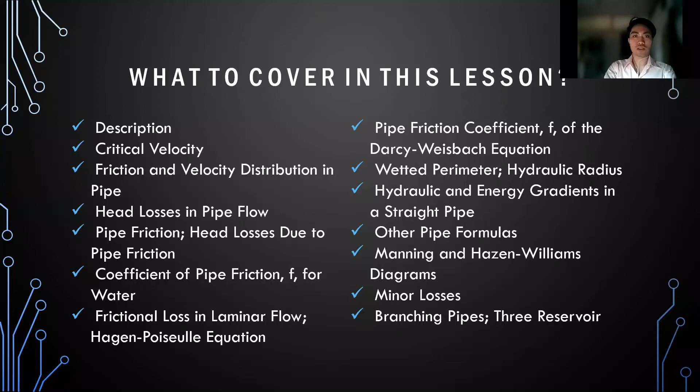So let's start with the most basic question: ano po ba ang pipe? Obviously, alam naman natin na ang pipe is just a closed conduit na nagtatransport ng either liquid or gas, under pressure. Gusto kong i-emphasize yung under pressure kasi hindi lahat ng makikita nating tubo is considered as a pipe. For example, yung tubig na nanggagaling from our water source, they are transported under pressure, so therefore they are called pipe.

Unlike, for example, yung sewer line natin, hindi naman sila nangangailangan ng pressure kapag itatransport nila yung fluid doon. So therefore, it's not considered as pipe, but rather an open channel instead. So yun yung parang distinction — pipes dapat, they should be under pressure, yung fluid na dinadala niya.

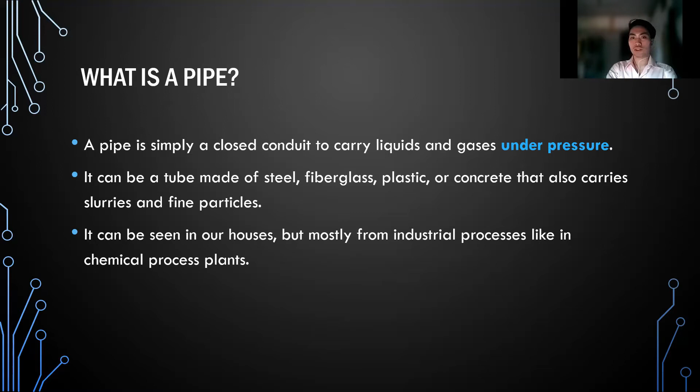So the next thing is, ang pipe hindi lang siya gawa sa plastic na usual na nakikita natin, but it can also be made of steel, fiberglass, and concrete, okay, that carries slurries and fine particles. And as I've said, ito yung nakita natin sa houses, yung from our water source, and mostly sa mga industrial, like sa chemical process plants.

So next thing is, ever wondered bakit ba circular in shape ang pipes natin? Sabi rito, most pipes are in circular form because it offers the least resistance to surface friction. Ano ba yung surface friction na yan? Ganito kasi yan — ang fluid natin kapag nag-flow sa pipe, nagkakaroon or nagde-develop ng friction. Ngayon, pag meron kang na-de-develop na friction, nagkakaroon din ng tinatawag natin head loss or energy loss, which is to be discussed later on. So that's why kailangan natin i-take into consideration yung surface friction — it should be of least resistance.

Now, ang circle kasi compared sa other polygons, say for example, square, meron silang mas maliit na perimeter compared sa other polygons. At dahil maliit ang perimeter nila, meron silang maliit na surface area. At dahil maliit ang surface area nila, it will offer the least resistance sa shape na circle. That's why they are commonly circular in form. Additionally, it has low initial cost and it provides the highest rate of flow, and there is minimum deformation that is seen kapag meron kang external pressure na applied.

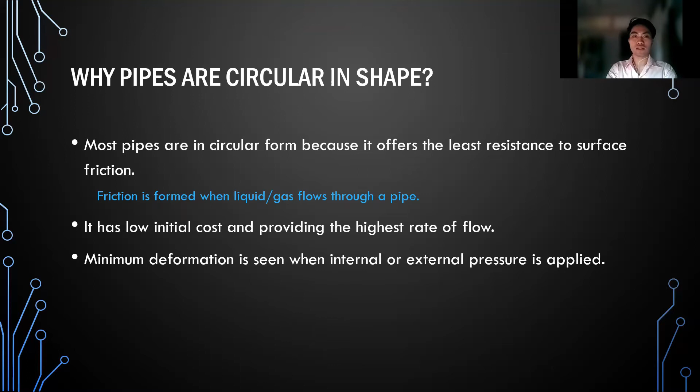Okay, so let's go to critical velocity. Critical velocity is just simply the velocity na kung saan nagbabago ang fluid mo from having a laminar flow to turbulent flow. Laminar flow and turbulent flow, na-discuss na ito sa previous discussions. We know that laminar flow ay characterized by having low velocity movements. So kung meron siyang low velocity movements, yung individual particles sa fluid na yon ay may sinusundan na tinatawag nating well-defined path — hindi sila gulo-gulo, para silang straight line, or not necessarily sobrang straight, but alam natin na may defined na path.

Unlike sa turbulent flow naman na kabaliktaran ng laminar flow, this is characterized by having a high velocity movement. At dahil mabilis ang movement, yung individual particles niya ay nagkakagulo-gulo, kaya they keep on crossing within each other. So hindi na nila nasusunod yung tinatawag na well-defined path.

So next, critical velocity experiment. This is Osborne-Reynolds, by the way.

So noong 1883, nagkaroon tayo ng experiment, si Osborne-Reynolds ng experiment. Where this is your glass tank, filled with water. This is your glass tube that has its bulb at one end at meron namang bell mouth sa other end. Now, this is your injector, a color, that contains colored dye.

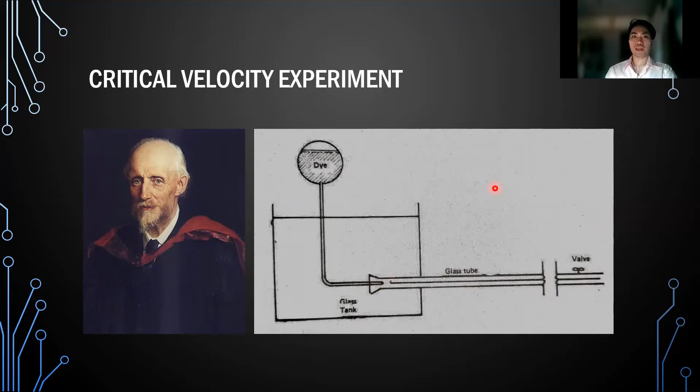Whereas nung tinodo naman ni Osborne ang pagbukas ng valve, at ulit, logically speaking, pag tinodo mo ang pagbukas ng isang valve, bibilis ang movement ng fluid. So magugulo yung individual particles ng dye. At ganun nga ang nangyari, naggulo na, hindi na nasunod ang path, kundi nagmix na siya doon sa water. Okay, so ganun lang po yung naging experiment ni Osborne-Reynolds.

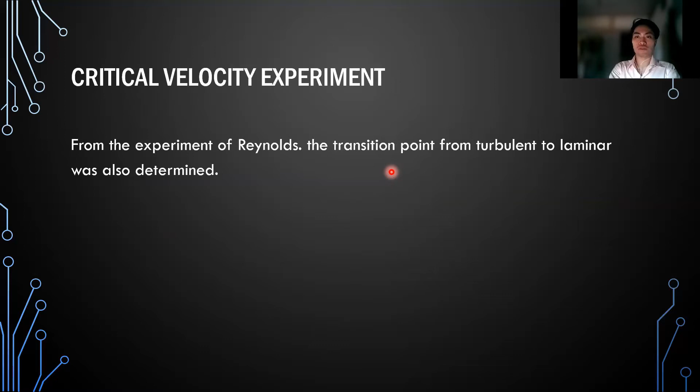So to further understand this concept, nag-provide po ako ng links para ma-visit mo. Additionally, dun sa experiment ni Reynolds, nalaman daw natin yung tinatawag na transition point from turbulent to laminar flow. Ayon sa kanya, it would require a smaller velocity kung gusto mong baguhin ang fluid na may turbulent flow patungong laminar flow, compared sa laminar flow to turbulent naman daw. And this is what we call the upper and lower critical velocities.

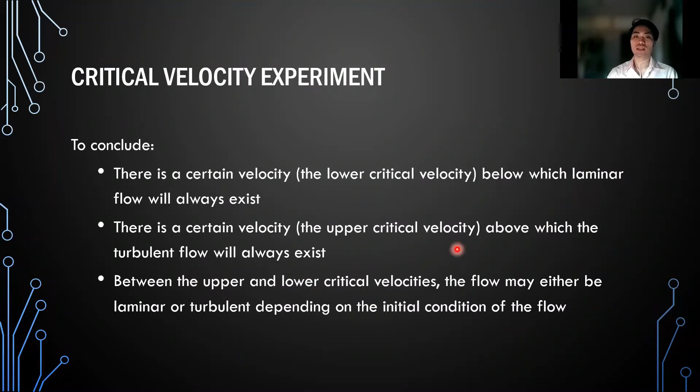So to conclude, alam natin na meron laging certain velocity which is the lower critical velocity, na kung saan lagi mag-e-exist si laminar flow. Ganun din kay upper critical velocity, na lagi mag-e-exist turbulent. So sa pagitan ni upper and lower critical velocities, dito sa pagitan na yan, there will always exist either streamline flow or turbulent flow, depende sa kung ano yung naging initial condition niya, dahil kung streamline flow ba siya nung una o turbulent flow ba siya nung una.

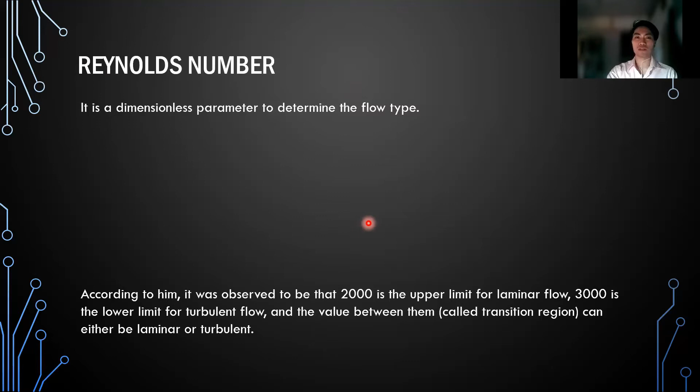Okay, so another thing is, sa experiment niya, si Osborne-Reynolds ay nakapag-develop din po siya ng criterion para malaman ang flow ng isang fluid. And that is what we call the Reynolds number. So Reynolds number is simply a dimensionless parameter para malaman nga natin yung flow type ng isang fluid. It has this formula that is equivalent to VD rho over mu, or VD over small letter v.

Where V, of course, is the mean velocity in meters per second, D is the diameter of the pipe in meters. Rho is your density in kilogram per cubic meter. Mu is your dynamic viscosity in Pascal-seconds. And then this small letter v is the ratio of the dynamic viscosity to the density, which is also what we call the kinematic viscosity. This is the formula of your Reynolds number para ma-determine natin ang flow type ng isang fluid.

According kay Osborne, sabi po rito, it was observed to be that 2,000 is the upper limit for laminar flow, 3,000 is the lower limit for turbulent flow, and the value between them, which is called the transition region, can either be laminar or turbulent.

So ano ang ibig sabihin nun? Sabi niya, kapag meron kang value ng Reynolds number na, let's say, 2,000 or less than 2,000, it means that yung flow type ng fluid mo would be laminar. Whereas kapag meron ka namang value ng Reynolds number na 3,000 or higher than 3,000, it means that the flow type is turbulent flow.

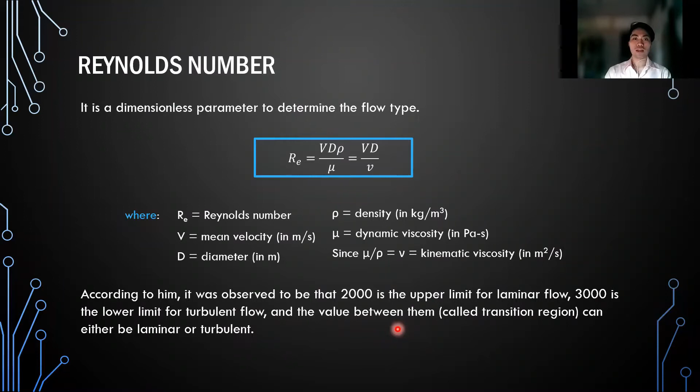At kapag nakakuha ka ng Reynolds number na sa pagitan ng 2,000 at 3,000, that is what we call the transition region, na again, sabi ko kanina, it can either be laminar or turbulent depende sa kung ano yung initial condition niya. Next po, let's try to solve this problem.

Calculate the Reynolds number of the fluid having a viscosity of 0.6 Newton second per square meter and a relative density of 850 kilograms per cubic meter, flowing through a pipe with a diameter of 25 millimeters and a velocity of 2.5 meters per second.

So apply given si data, no? 2.5, 25, 850, 0.6, and then apply lang natin yung formula ng Reynolds number, VD rho over mu. So that is equivalent to 2.5 times 0.025 times 850 over 0.6.

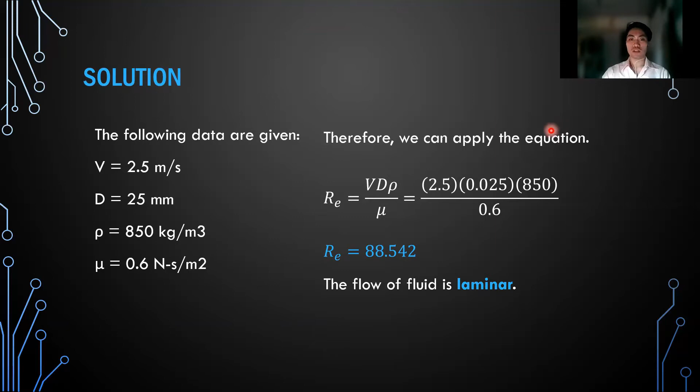And the answer is 88.542. So based sa criterion again ni Osborne Reynolds, hindi naman siya lumagpas sa 2,000. So therefore, this flow of fluid is considered to be laminar.

Okay, next po. Now, what is the profile of velocity of fluid in the pipe? Ano ba itsura ng velocity kapag nasa loob siya ng pipe? Yung fluid, velocity ng fluid. So this is the cross-section of your pipe.

Kung mapapansin nyo, parabolic ang shape ng velocity profile ng fluid, kasi ang maximum velocity occurring ay sa center. Ito yung sinasabi ko kanina sa friction thing. Kung mapapansin nyo, ang maximum velocity ay mag-occur sa middle kasi siya yung farthest dun sa pipe wall.

Again, kapag sa pipe wall at sa fluid may contact, nagkakaroon ng friction. At pag may friction, of course, magkakaroon ng head loss, magkakaroon ng decrease in the velocity. Kaya kung mapapansin nyo, as you approach patungo dun sa pipe wall, bumababa yung value ng velocity. Kaya nagmumukha siyang parabolic.

Now, of course, kung yung pipe mo is frictionless, magiging straight lang to. Magiging same lang yung velocity distribution niya, mapagitna, mapadulo, no? If frictionless. If not, magiging parabolic siya.

Now, if the pipe is bent, no? Ngayon, if balik mo naman yung pipe mo, ang mangyayari naman dyan, from being the center having the maximum velocity, mag-move yung maximum velocity sa part na form yung concave. So dito, na-bend siya pa-concave, therefore umangat yung maximum velocity mo.

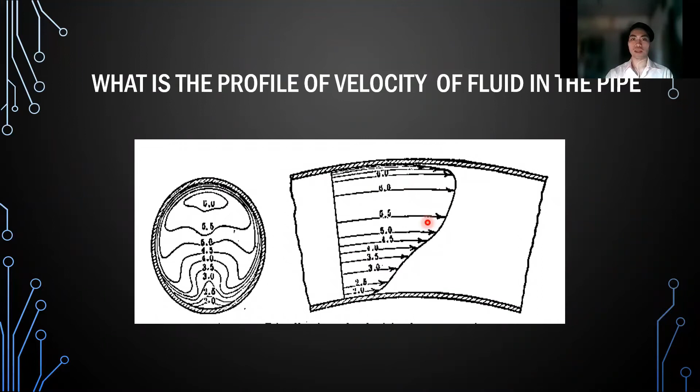At same thing pa rin, if presence si friction sa pipe walls, of course mariretard yung fluid, ang mangyayari, mababawasan yung velocity hanggang sa papalapit siya ng papalapit dun sa wall ng pipe. Okay, next is the velocity distribution.

Now, we have this term pipe factor, which is simply the ratio of the V over Vmax, where your V is the mean velocity sa pipe, and your Vmax is the maximum velocity in your pipe that is occurring at the center.

Now, Karman and Prandtl presented that the velocity distribution in the mainstream is represented by the relation. Na ito yung relation mo: V is equivalent to Vmax times Y over R raised to N, where N is obviously a constant, and it is equivalent to 1 over 7 if you have the Reynolds of about 100,000.

1 over 8 naman siya if you have your Reynolds number between 100,000 and 400,000, but for smooth pipes. If rough pipes naman, then the value of N would be 1 over 5.

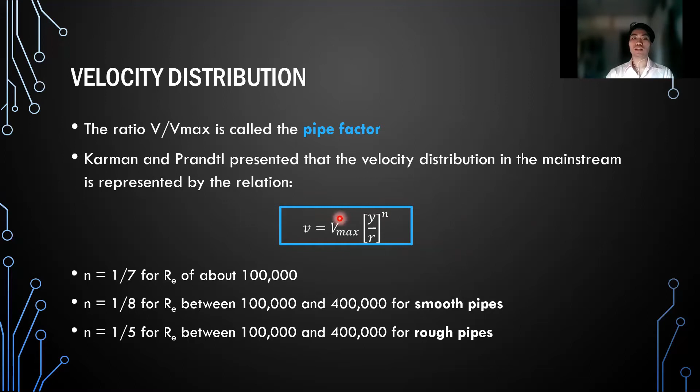Okay, now itong small letter V na to, that is the velocity of the fluid particle that is at y distance from the wall of the pipe, having radius r. Vmax, again, is the maximum velocity occurring at the center. Now, this is what we call the relation na pinresent ni Karman and Prandtl.

Now, next thing is the graph of the pipe factor as a function of Reynolds number. Ibig sabihin, pwede mo rin daw pala mahanap si pipe factor when you have the Reynolds number. Now, this is the graph of it. So, let's try this example.

For a given Reynolds number of 100,000, calculate the radius of a pipe with y that is equivalent to 15 millimeters from the pipe wall. Now, since given naman si Reynolds number na 100,000, of course ma-determine na natin si value of the constant, na 1 over 7.

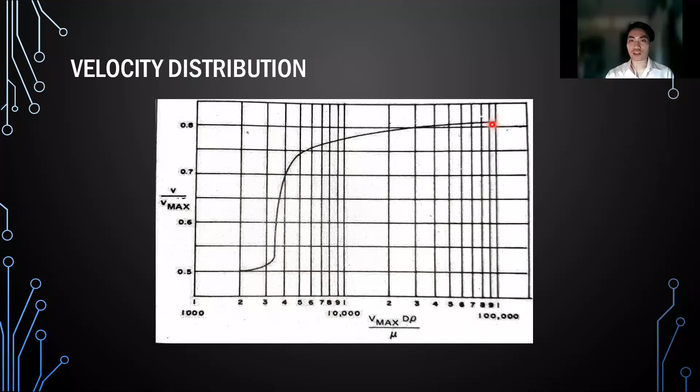By plotting from the table, since Reynolds number is given as 100,000, we can find the value of pipe factor, which is approximately 0.82. So divide both sides by Vmax to cancel Vmax and get the pipe factor: 0.82 equals 15 over r raised to 1 over 7. Solving for r, we determine 60.17 millimeters.

Now, head losses in pipe flow. What are the head losses in pipe flow? This is the energy loss I mentioned earlier, also known as the energy loss, measured in joules per Newton, or simply in meters, since a joule is equivalent to 1 Newton-meter. Therefore, canceling the Newtons, what remains is the meter.

So now, head losses in a pipe can be categorized as major or minor loss, with major being the pipe friction. The reason it is major is because pipe friction is the most common loss that occurs in a pipe. That's why it's classified as a major loss, and that is further discussed later on.

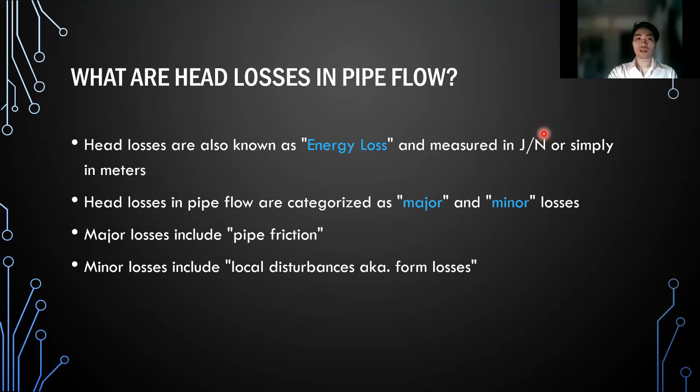Minor losses are the local disturbances we mentioned, or what we know as form losses. So next, let's go to these local disturbances. In local disturbances, or form losses, we have 4 head losses that cause head loss. First, we have the head loss due to the sudden contraction of the pipe's cross-section.

This is denoted by H sub C. Of course, if you have a contraction, you also have an enlargement, and this is denoted by H sub E. Next is due to obstruction caused by the gate valve, denoted as H sub O, and you also have head loss due to pipe bend, denoted by H sub B.

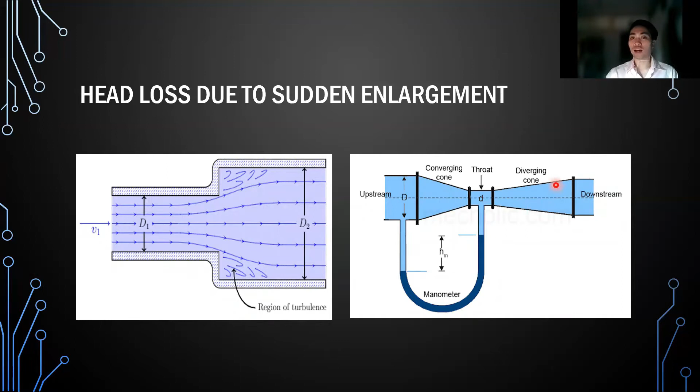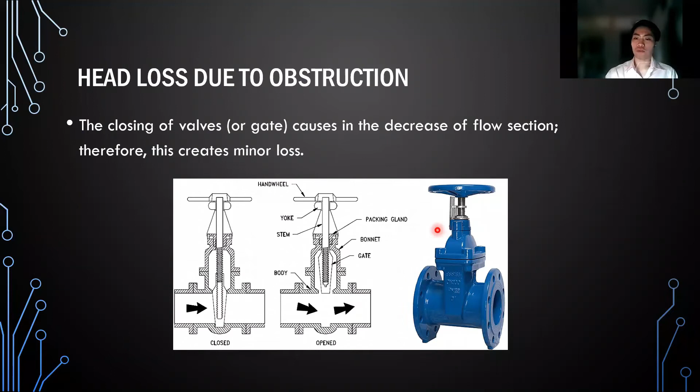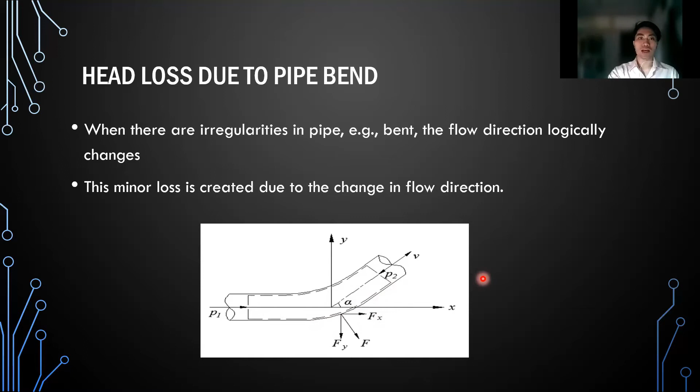To conclude, we know that the summation of the head losses in pipe flow is equivalent to H sub F, which is what we call the major loss or the pipe friction to be discussed later, plus H sub C, plus H sub E, plus H sub O, plus H sub B, which are the four I discussed earlier.

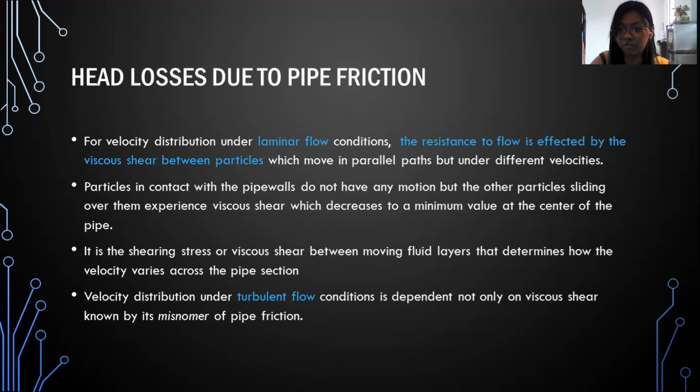At the pipe wall, this is where the no-slip condition occurs, and the velocity here is 0. The maximum velocity is usually at the center of the pipe. This is applicable only for laminar flow conditions.

Darcy-Weisbach equation. This equation was developed by Henry Darcy and Julius Weisbach. The equation is flashed in the PPT presentation. Head loss is denoted by H sub F.

So F is the coefficient of pipe friction, L is the length of the pipe, D is the internal diameter, V is the mean velocity, and G is the gravitational pull.

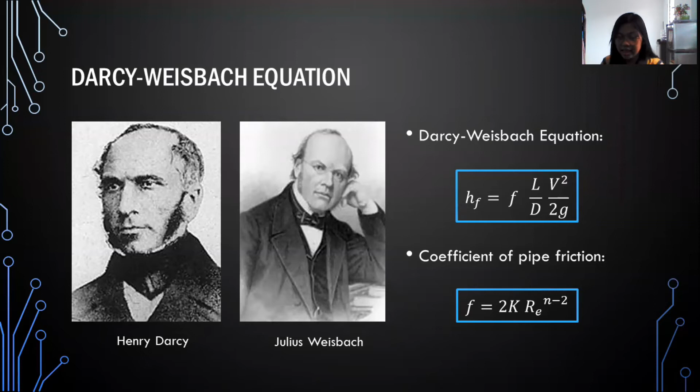The coefficient of pipe friction, or F, for straight smooth pipes which carry water under turbulent conditions - Fanning gives the average values of the pipe friction coefficient F for different pipe diameters and mean velocities of flow.

For the sample problem: a city water supply pipeline consists of a new 60 centimeter cast iron pipe. Compute the frictional loss of head per kilometer of pipe when the discharge is 0.35 cubic meter per second.

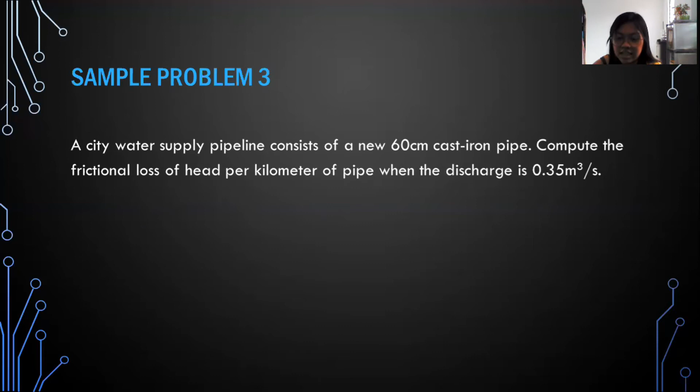Here, the diameter is given, 60 centimeters, so that's 0.6 meters. The other given information is 0.35 cubic meter per second, that is the discharge. So we can use that to calculate the velocity.

So 0.35, the discharge, over pi over 4 multiplied by the diameter, 0.6, squared. With that, we will get a velocity of 1.24 meter per second.

So we have the diameter and we also have the velocity, meaning we can find the coefficient of pipe friction. By plotting from Fanning's table, F is determined to be 0.018. Let's go back to the table.

So we have all the needed information. We will input all the values into the formula of the head loss. Coefficient of pipe friction is 0.018, the diameter is 0.6, the mean velocity is 1.24, and gravitational pull 9.81.

With that, we will come up with an answer of 2.35 joule per Newton. That is the head loss.

For sample problem number 4: determine the discharge of water through a 90 centimeter wood stave pipe if the loss of head is 5 joule per Newton in a length of 1,600 meters.

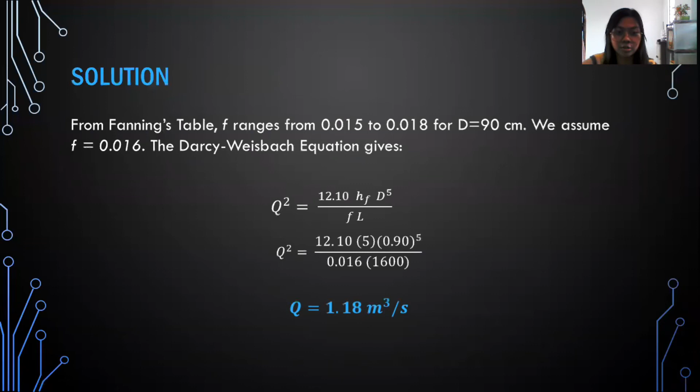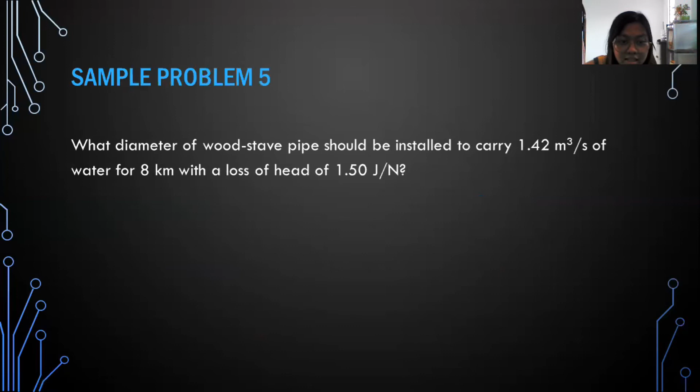In this problem, the coefficient of pipe friction is crucial for the Darcy-Weisbach equation. Let's try another value, 0.013. Using the same procedure, we come up with a diameter of 1.63 meters and a velocity of 0.68. Checking the table: the diameter is 1.63 meters, around 163, and the velocity is 0.68. We get 0.013, which is the same value we assumed, so it's okay. We were finding the diameter, so the answer for this problem is 1.63 meters.

Next, sample problem number 6. Water is pumped through a vertical 5 centimeter new galvanized iron pipe to an elevated tank on the roof of a building. The pressure on the discharge side of the pump is 1,380 kilopascals. What pressure can be expected at a point in the pipe 76 meters above the pump when the flow is 9.5 liters? For this problem, the diameter is given as 5 centimeters, and the velocity is unknown.

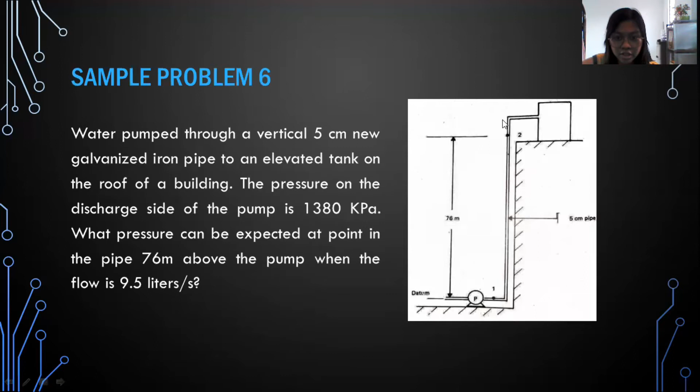In this scenario, we can apply the concept behind Bernoulli's equation, using this formula for points 1 and 2. Since V sub 1 equals V sub 2, we can simplify the formula. Calculating this equation, we come up with the answer: the pressure is 225 kilopascals at the point 76 meters above the pump. So the answer in this problem is 225 kilopascals.

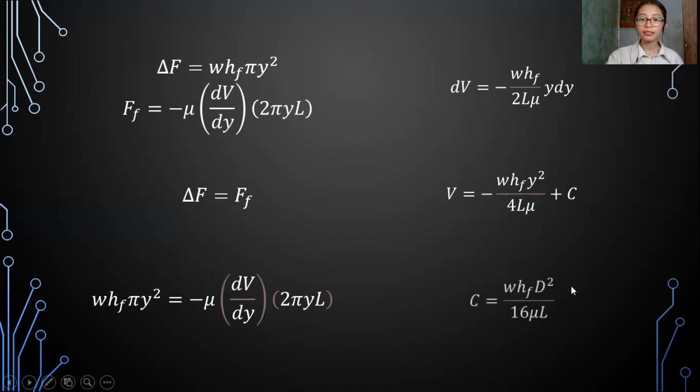After non, magsiset tayo ng boundary condition sa wall ng ating pipe where V is equal to 0. So papalitan natin ito ng 0, and y is equal to d over 2, yung ating radius d over 2. Makukuha na natin si C. Substituting this value of C sa ating previous equation, makukuha na natin ang bagong equation na ito.

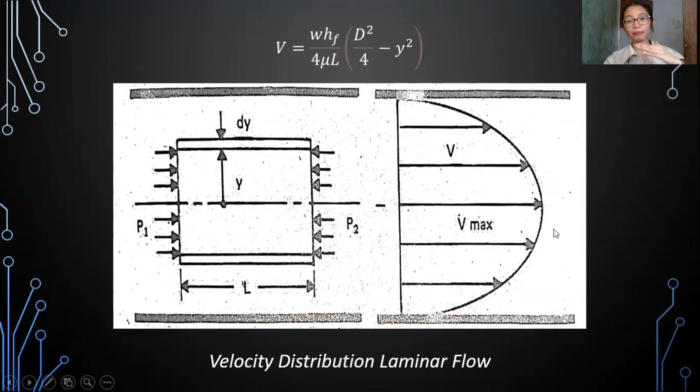Next, balik tayo sa ating unang figure. Kukuha tayo ng elemental ring na may thickness ulit na dy and radius na y. Since meron tayong flow rate sa loob ng ating pipe, itong elemental ring na ito ay may elemental flow rate na tatawagin natin dq. And this can be written as dq is equal to v times 2 pi y dy.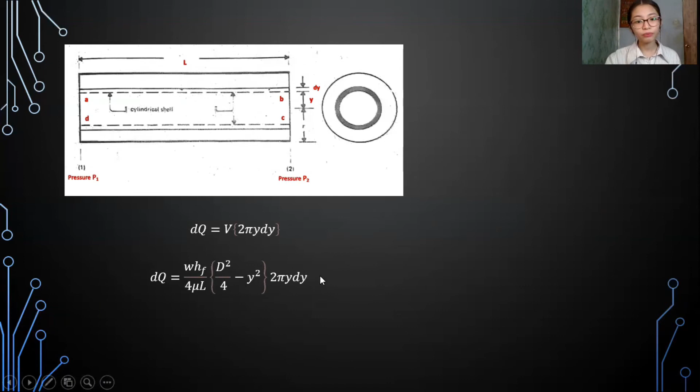Substitute natin ito sa ating nakuhang v kanina, at makukuha natin itong equation na ito which can also be written as this equation. Pag in-integrate natin itong equation na ito ulit from 0 to d over 2, makukuha natin ang ating Hagen-Poiseuille equation which is written as Q is equal to pi W HF all over 128 mu L times d to the fourth.

Mula dito sa equation ng ating Hagen-Poiseuille equation na based sa flow rate, makukuha rin natin ang ating frictional loss HF under laminar flow conditions. Pwede nating i-simplify itong equation na ito by further substituting itong value ng Q, which is alam naman natin na area times velocity. Sa pipe na ito, makikita natin na ang area times velocity ay pi d squared all over 4 times V. Substitute natin ito at makukuha natin ang ating frictional loss HF under laminar flow condition.

Parehas itong ituturing na Hagen-Poiseuille equation dahil derived na sila sa isa't isa. Makikita natin sa Hagen-Poiseuille equation na ito na ang flow rate sa loob ng isang pipe or cylinder ay nakadepende mostly sa diameter nito, sa laki, at sa length ng pipe, pati na rin sa viscosity ng ating flowing fluid. Makikita natin na pag in-increase natin ang viscosity or ang mu at ang ating length or ang L, magdi-decrease ang ating flow rates, since sila ay inversely proportional from each other. At pag in-increase naman natin si diameter, mag-i-increase din si flow rate since sila ay directly proportional.

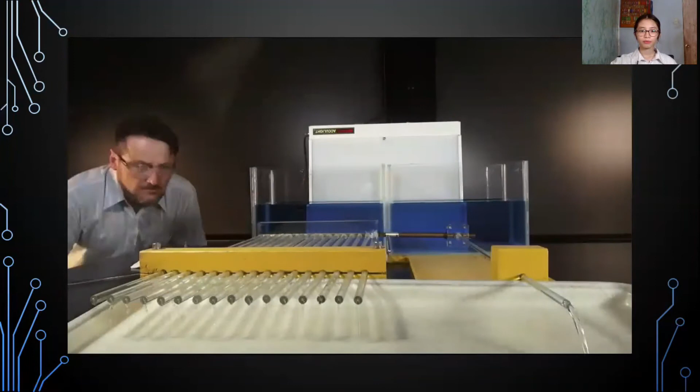Pwede siguro yan. So makikita natin sa video na mas marami yung outlet sa ating kaliwang tank kaysa sa kanan na tank. To be specific, 16 yung nasa kaliwa at iisa lang yung nasa kanan.

Ngayon, ang pinagkaiba nilang dalawa ay ang kanilang diameter. So makikita natin na although mas maraming outlet tubes yung nasa isang tank at iisa lang yun nandun sa isa, halos sabay pa rin yung pagbaba ng tubig, obviously, dahil mas malaki yung diameter nung nasa right tank. So binu-prove nito yung ating Hagen-Poiseuille equation na kapag ang diameter ng tube ay directly proportional sa ating flow rate. So since in-increase yung diameter sa ating right tube or right tank, mas mataas din yung flow rate niya.

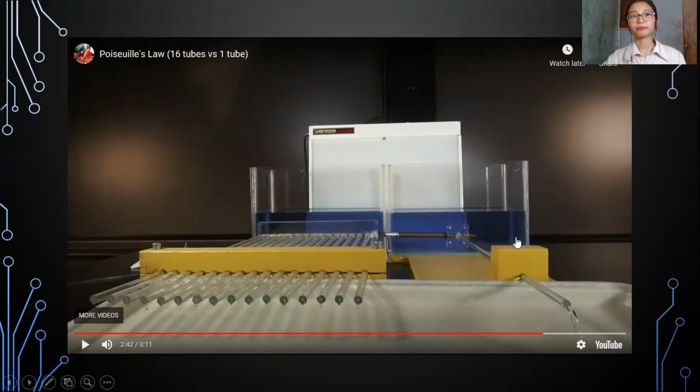So here are some remarks. First, there is no velocity at the solid boundary, and in laminar flow, shear stress is given by the relationship tau is equal to mu dv over dy.

Hindi lang ito assumed, kundi verified ito experimentally, hindi lamang ni Hagen at ni Poiseuille, kundi pati rin ng ating iba pang later investigators.

Next, Hagen-Poiseuille equation can be reduced into a form similar to Darcy-Weisbach equation. Ang equation na tinutukoy doon ay ito: HF is equal to 64 over Reynolds number times L over D times V squared over 2G. So which shows that the pipe friction coefficient F for laminar flow is F is equal to 64 over RE. Ito yung nasa kanina nating unang-unang page ng ating coefficient of pipe friction for laminar flow. Nagaling dito sa equation na ito.

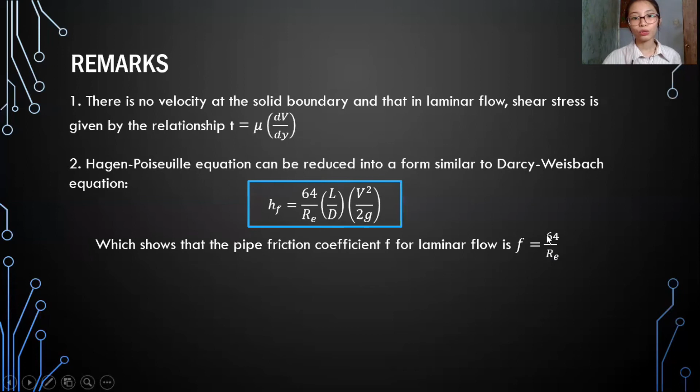And lastly, last remark for this topic: the relationship of maximum velocity Vmax and the mean velocity V can be obtained through noting that Vmax occurs at y is equal to 0. So y is equal to 0 kasi alam natin na yung pipe natin ay ganyan, at yung y niya ay yung radius. So pag sinabi mong y is equal to 0, nasa gitna yun. So Vmax is equal to 2V. Itong relationship nito. Okay, so now let's go to coefficient of pipe friction of the Darcy-Weisbach equation.

So in this part, I will talk about the determination of F of the Darcy-Weisbach equation for pipes having different degrees of roughness and through which any kind of fluid flows, hindi lamang water, kundi kahit anong kind of fluid.

So para sa pipes under laminar flow, kung saan ang ating Reynolds number R sub E is less than or about 2,000, yung head loss natin ay independent, hindi nakadepende mula sa degree ng roughness ng inner surface ng ating pipe. So kanina, na-determine natin sa Hagen-Poiseuille equation na yung value of F or coefficient of pipe friction sa under this condition or laminar flow ay F is equal to 64 over R sub E.

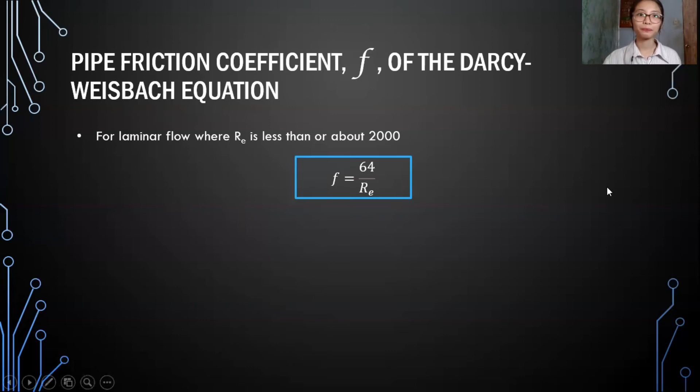Pero kapag ang Reynolds number natin ay lumagpas ng 2,000 and umabot sa more than 3,000, in almost all circumstances, ito ay wala na tayo sa laminar flow, kundi nandun na tayo sa turbulent flow. Sa case na ito, ang coefficient of pipe friction natin, pati ang frictional loss or H sub F tsaka F natin ay dependent hindi lamang sa Reynolds number, kundi pati na rin sa relative roughness ng ating pipe.

So ang relative roughness is given by the equation epsilon over diameter, kung saan ang epsilon na to ay ang tinatawag o ang tinutukoy nito ay ang height of ating protuberances. So ito yun, this is the epsilon. Ito yung roughness ng ating pipe. Tapos, yung height ng bawat protuberances ay tinatawag nating epsilon.

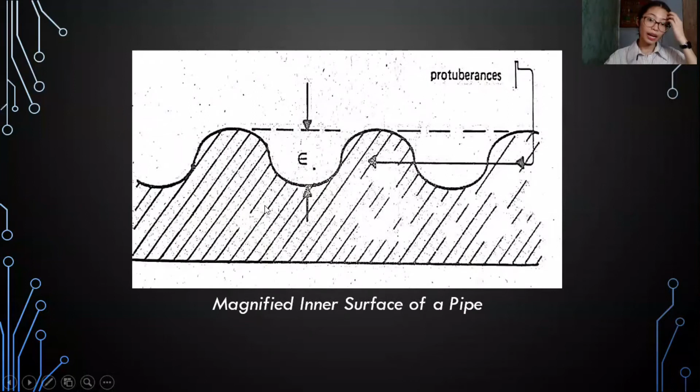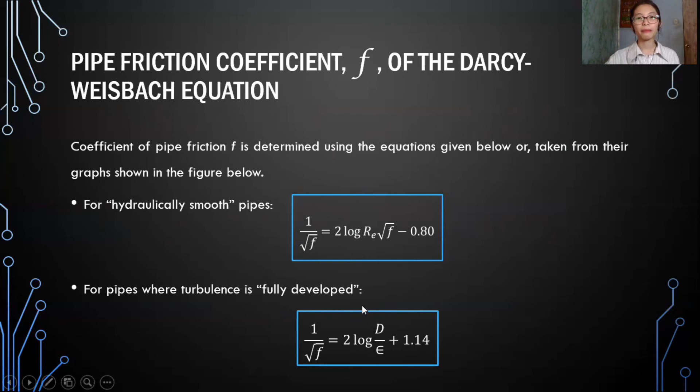So, here are some remarks for this. How do we know if flow is hydraulically smooth or fully developed?

In turbulent flow, there is a layer known as the boundary layer, a thin layer adjacent to the pipe wall where the flow is still laminar. If epsilon is less than the thickness of this layer, the pipe is considered to be flowing hydraulically smooth, meaning the value of F is independent of the pipe's roughness. But if epsilon is greater than the boundary layer thickness, then the pipe's roughness becomes a factor on flow turbulence and has a direct effect on the value of F.

When the amount of turbulence has increased to a maximum value as a result of increase in Reynolds number, the flow turbulence is said to be fully developed. This condition causes a decrease in the thickness of the boundary layer.

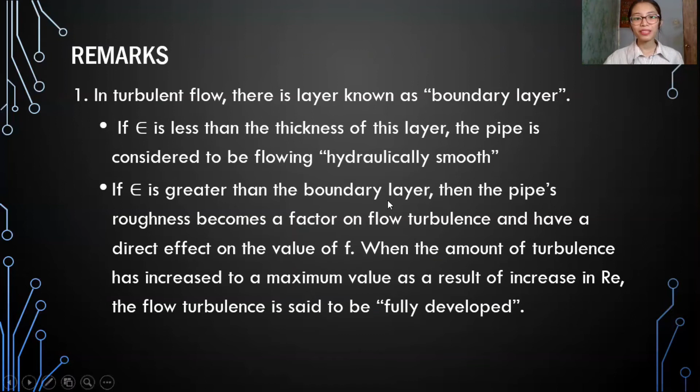Between these two conditions, hydraulically smooth and fully developed, we have a region given by the relation 1 over square root of F, as suggested by Colebrook and White, 1939. Lastly, in the region where Reynolds number is greater than or equal to 2,000 but less than or equal to 3,000, where flow is either laminar or turbulent, values of F corresponding to a Reynolds number of 3,000 are recommended for safety and design purposes. I hope you understood. Let's go now to our sample problems.

Sample problem number 7. An oil with density 900 kilograms per cubic meter and kinematic viscosity 0.0002 square meter per second flows upward through an inclined pipe as shown. Assume this pipe is under steady laminar flow, and compute the following: head loss between section 1 and 2, and the flow rate.

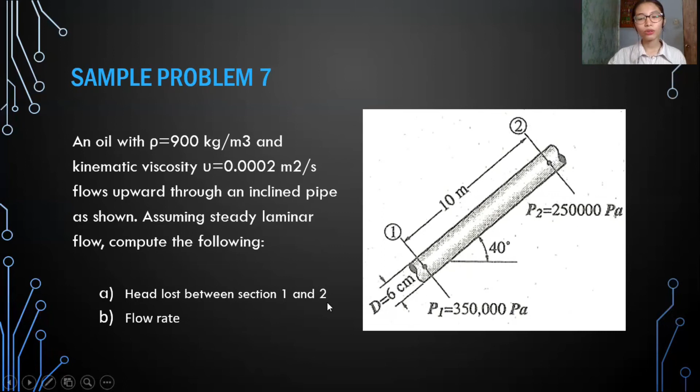Pressure head is equal to pressure over specific weight, and specific weight is equal to rho times gravity. Substituting values from our figure: pressure at point 1 is 350,000 Pascal, all over rho given in the problem, which is 900 times gravity 9.81. From this, we get the total energy head at point 1, which is 39.642 meters.

That's not yet the final answer since we need the head loss between sections 1 and 2. Next we need the total energy head at point 2, given by this equation, which includes P over W plus z since there is height. Substituting: P2 is 250,000 all over specific weight (rho times g = 900 times 9.81), plus z which is 10 sine of 40 degrees. This gives us 34.744 meters.

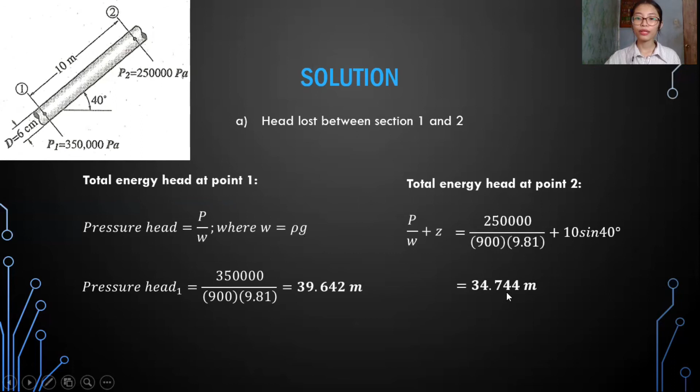We get the head loss by subtracting these two: total energy head at point 1 minus total energy head at point 2, giving us 4.898 meters. That easy. Next we find the flow rate.

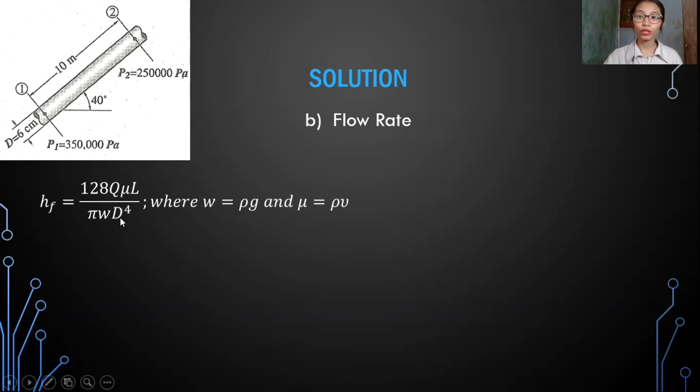How do we find the flow rate from this figure? We know from our derivation earlier that head loss equals 128 Q mu L all over pi W D to the fourth, where W equals rho times g, and mu equals rho times the kinematic viscosity given in the problem.

Substituting this gives us a new equation, substituting all the given values from the problem and the figure, and this is the equation we get. Solving this, we get the answer Q equals 0.007642 cubic meter per second.

That's easy. Okay, next problem, which is the last problem for this section. A hypodermic needle has an inside diameter of 0.3 millimeters and 60 millimeters in length as shown, here is our figure. The piston moves to the right at a speed of 18 millimeters per second, and there is no leakage.

The medicine in the hypodermic has a viscosity of mu equals 0.980 times 10 raised to negative 3 Pascal second, and its density is 800 kilogram per cubic meter. Consider flows in both needle and cylinder, and neglect exit losses from the needle as well as losses at the juncture of the needle and cylinder.

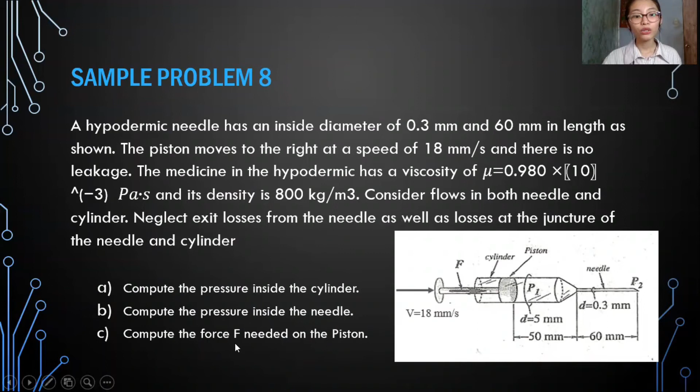From that problem, here are our requirements: we need the pressure inside the needle, pressure inside the cylinder, and the force F needed on this piston.

Let's proceed. First is pressure inside the cylinder. We get this by knowing that Q equals area times velocity. From this figure, our area is pi over 4 times 0.005 squared times 0.018.

Mula yan dito sa ating cylinder, kasi cylinder pa rin hinahanap natin. So ang flow rate sa ating cylinder ay 3.534 times 10 raised to negative 7 cubic meter per second.

Next, ito ulit ang ating equation. Mula sa ating equation, makukuha natin yung equation ng pressure, which is yung hinahanap, which is ang rho G times H sub F. Ito po yung equation na ito: 128 Q mu L all over pi D to the fourth. Yan po ang ating equation ng pressure.

Mula dyan, substitute lang po natin ang ating values. 128, yung nakuha po natin Q kanina, and then ang ating mu na given sa ating problem, ang ating length na 0.05 meters, naka-meters po yan kaya po lumiit, and then ang ating pi d to the 4. Okay? So mula dyan makukuha natin ang pressure inside the cylinder, which is 1.129 Pascal.

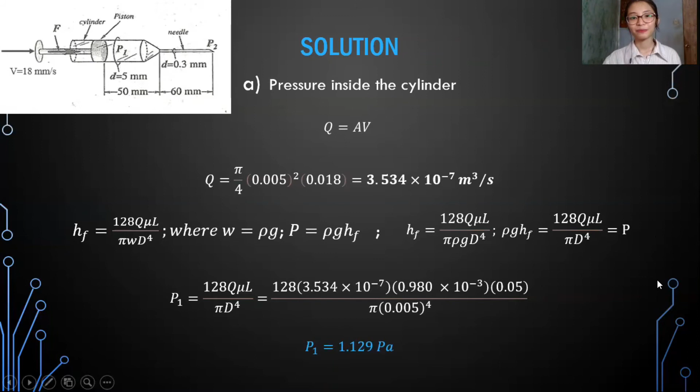Next po, pressure inside the needle naman tayo. Alam na natin na ang equation for pressure ay this one. Substitute lang po tayo: 128 times yung flow rate na nakuha natin kanina, times mu na sabi sa problem, times length ng needle na 0.06 meters, all over pi times ang ating diameter to the 4. Makuha natin ang pressure inside the needle, which is 104,525 Pascal. So mas malaki yung pressure niya since mas maliit yung diameter niya.

Okay, next tayo, last na po, force F needed on the piston. So alam ulit natin, kanina recall natin, nasabi ko na force is equal to pressure times area. So makukuha natin mula doon ang equation na to: Force is equal to P2 minus P1 times area. Makukuha natin ang force F through subtracting yung nakuha nating P2 or yung pressure inside the needle minus yung pressure P1 or yung pressure inside the cylinder, times yung area natin, which is yung pi over 4 times diameter squared. Okay? Makukuha natin ang force F needed on the piston, which is 2.05 newtons. Yun lang po, maraming salamat.

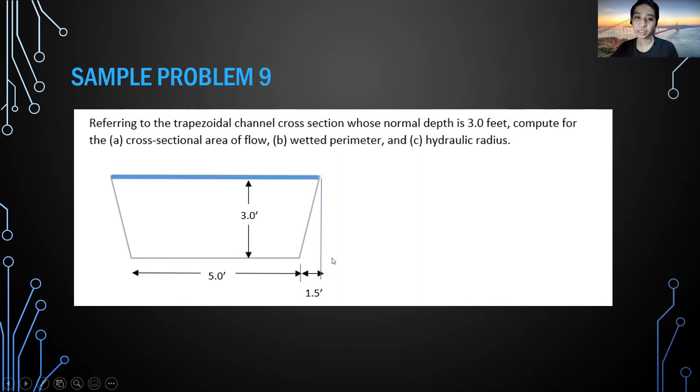Para makuha natin, balikan natin yung kanina na formula sa trapezoid, which is para daw mahanap natin yung area A, i-multiply natin yung quantity ng base plus yung Z times yung depth, as yung product nila ay yung sum ng product ng dalawa is i-multiply sa Y. So yun, A is equals to Y times quantity B plus Z times Y. I-plug in natin yung mga values kanina sa given na channel. Ang sagot natin is 28.5 feet squared.

Pagkatapos natin makuha yung area of flow ng cross-section, proceed na tayo sa wetted perimeter, kasi recall natin, ang hydraulic radius daw ay ratio ng A sa P. So para mahanap natin yung wetted perimeter, plug in lang natin yung values. Lalabas na yung size, yung length ng perimeter natin is 15.82 feet.

Para malaman natin yung hydraulic radius ng problem, i-ratio lang natin yung nakuha nating area dun sa na-compute nating wetted perimeter, which is 28.5 square feet divided by 15.82 feet. So ang hydraulic radius natin for that problem is 1.8 feet.

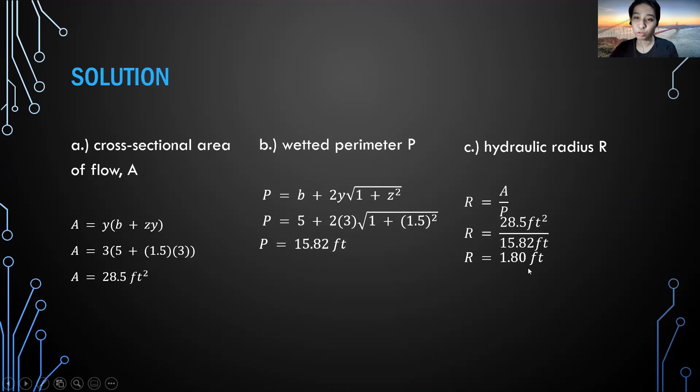Proceed na tayo sa hydraulic and energy gradients in a straight pipe. Recall natin yung Bernoulli's equation, which is velocity 1 squared over 2g plus p over gamma plus z is equals yun nga yung Bernoulli's constant. Sabi dito, HGL and EGL, yun nga yung hydraulic grade line and energy grade line, are graphical representations of Bernoulli's equation. So ipapakita natin paano nga ba nasabi na graphical representation sila ng Bernoulli's equation.

Isa-isahin muna natin. Hydraulic grade line, sometimes called piezometric head line, is represented by the equation p over gamma plus z, where p over gamma is pressure head and z is the elevation head. HGL is a plot of height.

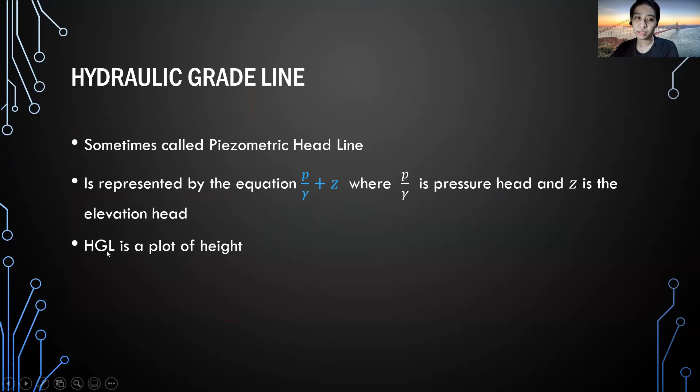Tapos ang energy grade line naman is Bernoulli constant. Paano natin nasabing Bernoulli constant? Kasi yung buong equation ng Bernoulli constant, yun yung kailangan gamitin para mahanap natin yung energy grade line. Kasi since nga siya yung parang total na energy doon, magagamit natin siya sa real flows with viscous losses.

So i-consider natin tong inclined pipe na pinakita para i-explain yung kanina. Sabi yung HGL daw, yung pinagsamang sum ng pressure head and elevation head. Yung elevation head natin dito is from a relative point from the arbitrary datum, which is yung sa baba, papunta doon sa pipe. Yun yung elevation head natin. Tapos yung pressure head naman natin is from the pipe hanggang doon sa na-reach nung piezometer natin.

Kaya nga tinatawag yung hydraulic grade line na piezometer grade line din, kasi nga reliant tayo sa value ng piezometer. Tapos neglected natin yung taas kasi yun yung parang energy losses. Kasi ang energy grade line natin is yung pinaka-total. Kumbaga yung pag pinag-plus lahat ng energy na nasa system natin, ang lalabas na sagot ay yung energy grade line.

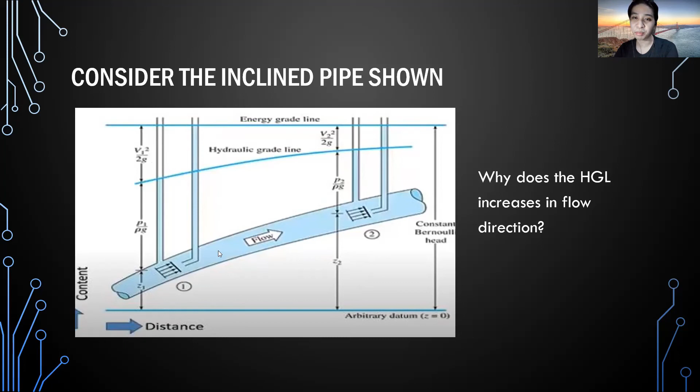Kaya tayo ng section 1 and section 2 para malaman natin kung ano ba yung progress ng hydraulic grade line, kung nagpro-progress pa or nagre-regress. Mas nakikita natin yung ganitong observation sa inviscid flows, kasi constant lang yung energy content unless may makita tayo dun, ma-observe natin sa hydraulic grade line kung nadadagdagan ba or nababawasan yung energy. Kasi nako-convert yung kinetic into pressure, pag dinagdagan ng pressure into potential. For further explanation regarding how hydraulic grade line works as well as the energy grade line, refer to this link below. Thank you.

Okay, let's move forward naman sa minor losses. Earlier, nabigyan na ng brief background yung about sa head losses, yung sa pressure head nga. This time, explore naman natin yung conditions kung saan nagaganap yung concept of minor losses. I-introduce natin ang two subtypes, which is yung una is sudden contraction of pipes, then yung pangalawa is sudden enlargement or expansion of pipes.

Minor losses. Ano nga ba yung pagkaka-define natin sa minor losses? Ang minor losses ay nagaganap sa isang piping system. Yung flow ng piping system kasi required siya na mag-pass through ng variety of fittings at abrupt changes sa area. Dahil doon, may encounter tayo ng additional head losses, which is result nun ay flow separation, which is categorized under minor losses.

Minor losses can be expressed in the equation: minor loss equals K, which is the coefficient we find in the table of values depending on the category or condition that happened. Then V is the velocity, and g is the constant. This results from changes of velocity—the velocity head we're discussing in this part.

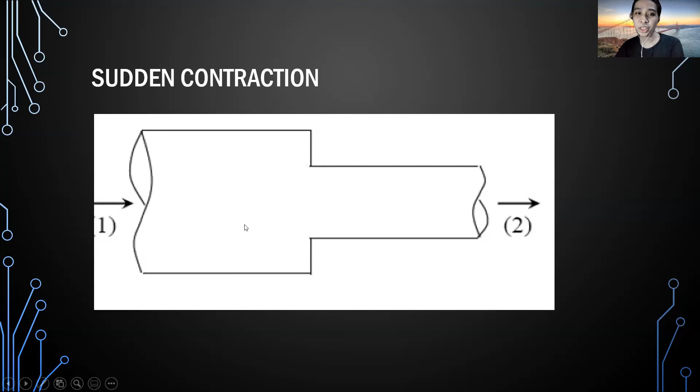So here's the first one, sudden contraction. We notice it goes from a larger pipe into a smaller pipe. The loss of head due to sudden contraction may be expressed as: head loss of contraction equals coefficient of contraction times velocity squared all over 2g, where velocity is the mean velocity in the smaller pipe. And that coefficient can be expressed as the ratio of D2 over D1, the diameter of the second pipe over the first pipe.

So how do we explain sudden contraction properly? Let's imagine that the entrance is from a finite reservoir. From there we already know that sudden contraction happens between two sizes of pipes. Let's look at the table I mentioned earlier, which we base the values of Kc on—the coefficient of sudden contraction. There we can see the velocity, and the ratio of the first diameter of the pipe to the second diameter of the pipe. We'll understand it better with a problem.

Sample problem 13: What is the loss of head due to sudden contraction in a pipe carrying 57 liters of water, which suddenly changes from a diameter of 20 centimeters to 15 centimeters? Also find the pressure difference resulting from this change of section.

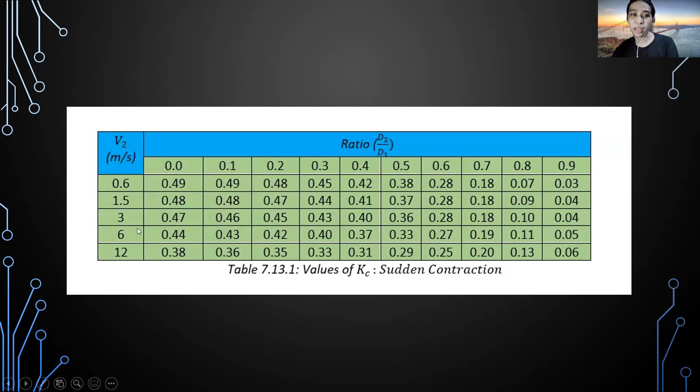Now we base this on the table of values I showed earlier. We notice there's no exact 3.2, so we'll do linear interpolation. We take the values from 3 to 6, then find a way to determine the value at 3.2. So let V2 equal 3.2 meters per second. Using linear interpolation, the coefficient of sudden contraction value we got is 0.14.

Let's plug it into the formula: head loss equals Kc times final velocity squared over 2g. So 0.14 times 3.20 squared, all over 2 times 9.81. The answer is 0.073 meters. That's the loss of head asked in the problem.

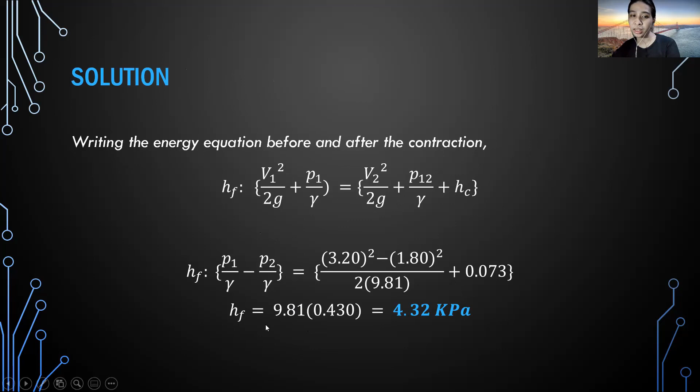Now let's proceed to the next part of the problem: find the pressure difference resulting from this change of section. We'll use the Bernoulli concept we recalled earlier—this is for the first pipe, then this is for the second pipe, since that's where the head loss occurs. We just plug in the values, and the answer we got is 4.32 kilopascals.

Now let's proceed to sudden enlargement. What do you notice about sudden enlargement? Unlike earlier where it went from a bigger pipe to a smaller pipe, here it goes from a smaller pipe into a bigger pipe. The loss of head due to sudden expansion or enlargement is similarly expressed as a fraction of the velocity head in the smaller pipe. This formula is similar to the earlier one, but here the smaller pipe comes first before the bigger pipe, so the velocity we use is the initial velocity since the smaller pipe comes first.

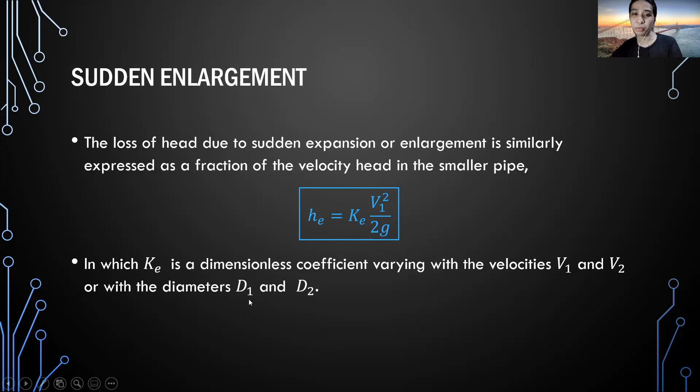Then there's Ke, the dimensionless coefficient based on the table of values for sudden enlargement, which still relies on the ratio between the first diameter and the second diameter. This is table 7.13.2 for sudden enlargement, and table 7.13.3 is for gradual enlargement, which is kind of a special case of sudden enlargement. So let's look at the problem.

Problem 14: What is the loss of head due to sudden enlargement in a pipe carrying 57 liters of water, which suddenly changes from a diameter of 15 centimeters to 20 centimeters? Also, find the pressure difference between the two points before and after the change of section.

So our first process is to find the ratio between the first diameter and the second diameter, which is 0.75. Then we need to obtain the radial velocities from the two pipes: the first pipe has 3.20 meters per second while the second has 1.8. We can see that the radial velocity of the first pipe is higher.

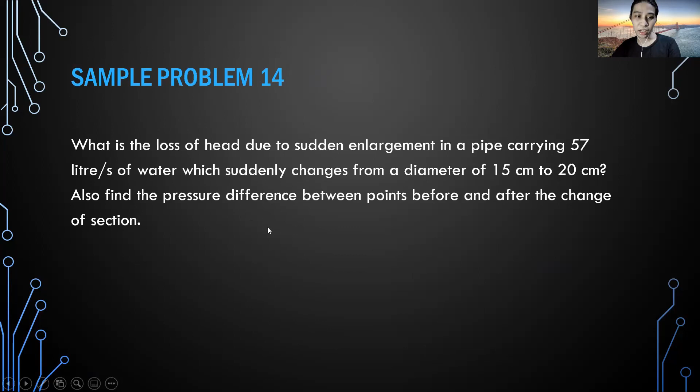The answer is 0.195. That's the value we plug into the formula for head loss due to sudden enlargement: 0.195 times 3.20 squared, all over 2 times 9.81, which is the constant of gravity. Our answer for head loss is 0.10 meters.

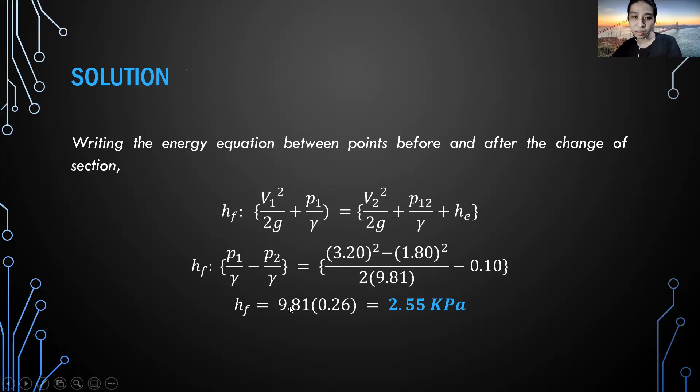Good day, I am Janet Olfashol and I will be discussing branching pipes, specifically three reservoir problems. There are two cases that we must consider in analyzing three reservoir problems.

By reason of continuity, what flows in and what flows out of junction J are equal. With this, we can derive a continuity equation: Q1 plus Q2 is equal to Q3. Under this flow condition, the liquid surface on the piezometer will be below reservoir A and reservoir B.

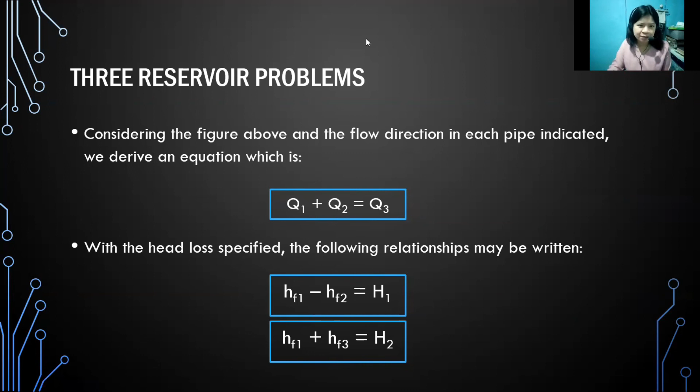For case 2, where the flow in the second pipe is towards reservoir B, the liquid surface on the piezometer rises to a point above that of reservoir B but below reservoir A. Under this flow condition, the continuity equation now becomes Q1 is equal to Q2 plus Q3.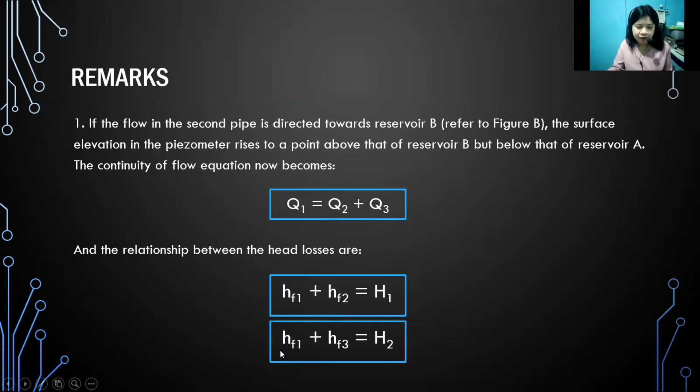Other head loss relationships are HF1 plus HF2 is equal to H1, and HF1 plus HF3 is equal to H2. Notice that this last equation, HF1 plus HF3 is equal to H2, is similar to our first case. That is because the flow in the second pipe does not affect the flow in the first and third pipes.

The three reservoir problem is the particular case in which the direction of flow in pipe 2 is usually unspecified. This particular case is solved by considering the following assumptions.

First, we assume that pipe 2 is closed. Therefore, HF2 is equal to 0. This condition makes HF1 equal to H1 and HF3 equal to H2, which in actuality is not true.

Under this consideration, Q1 and Q3 may be obtained from either the Darcy-Weisbach or Manning equation by assuming trial values of F or N if these values are not given.

If our Q1 is greater than Q3, the flow in pipe 2 is directed towards reservoir B. If Q1 is less than Q3, the flow in pipe 2 is directed away from reservoir B.

Finally, the continuity equation and the head loss relations are written based on the result obtained from A and B. The system of equations thus formed is solved in the manner of the foregoing method. To understand these concepts better, let us try solving this problem.

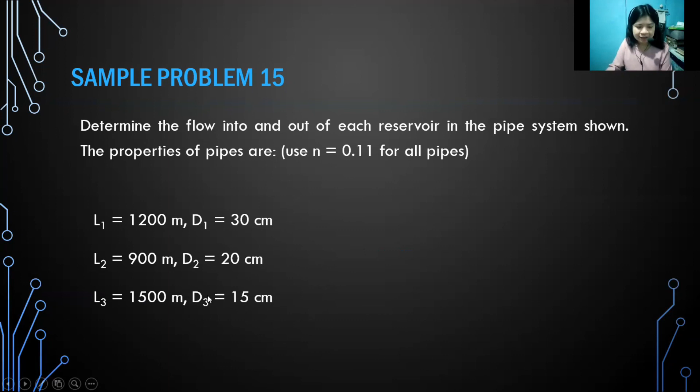Determine the flow into and out of each reservoir in the pipe system shown. The properties of pipes are L1 equal to 1,200 meters, D1 is 30 centimeters, L2 is 900 meters, D2 is 20 centimeters, and L3 is equal to 1,500 meters, D3 is equal to 15 centimeters.

In our problem, the flow direction in pipe 2 is not initially known, so we assume that this pipe is closed. Therefore, HF2 is equal to 0. HF1 then becomes H1 and HF3 becomes H2.

To solve for HF1, we subtract the elevations of reservoir A and B, that is 30 minus 24 is equal to 6 meters. To solve for HF3 or H2, we subtract the elevations of reservoir A and C, that is 30 minus 15 meters is equal to 15 meters.

Since the value of our pipe element N is given, we can use the Manning equation. That is HF is equal to 10.3 N squared times LQ squared, all over D raised to 16 over 3.

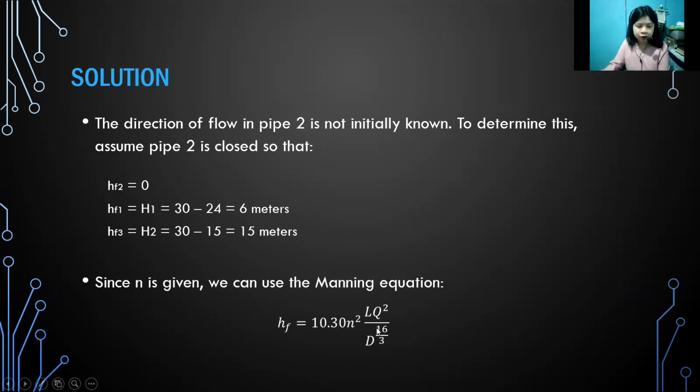Since we have the values of HF1 and HF3, we can solve for Q1 and Q3 using our Manning equation. Solving for this, we get the value of Q1, that is 0.081 meter cube per second or 81 liters per second. And Q3 is equal to 0.018 cubic meter per second or 18 liters per second.

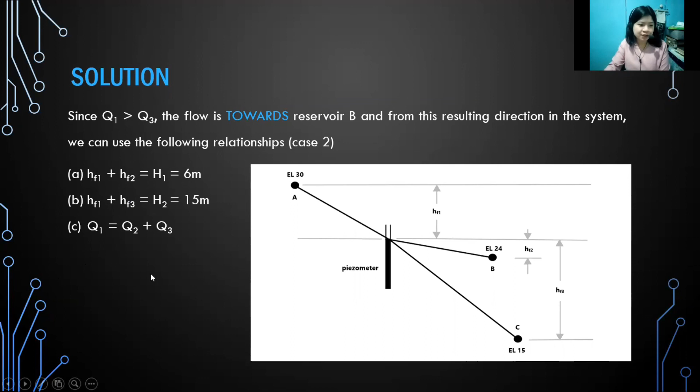Since our Q1 is greater than Q3, the flow is towards reservoir B, and from this resulting flow direction in the system, we can use the following relationships. So we will analyze this problem using case 2, and from case 2 we get the following equations.

Using the Manning equation for A and B and substituting all known information on the pipes, we can get the equation for Q2 and Q3 in terms of Q1. Then we will solve this equation, substituting it into our continuity of flow equation, and we will get this equation.

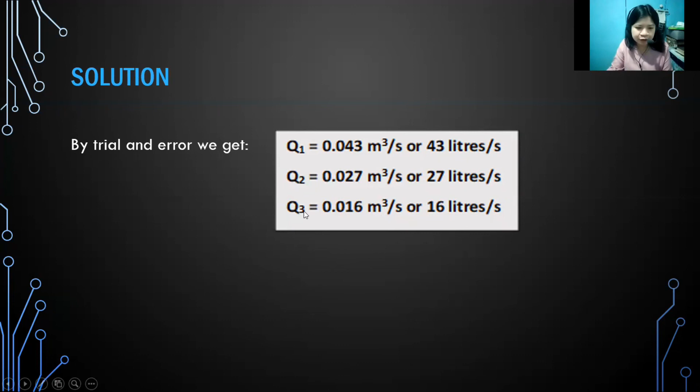From this, we can get the value of Q1, that is 0.043 cubic meter per second. We will then substitute this value of Q1 into the equations for Q2 and Q3, and then we will get the values: Q2 is equal to 0.027 cubic meter per second, and Q3 is equal to 0.016 cubic meter per second.

The flow from Reservoir A to junction P is 0.045 cubic meter per second, and F for all pipes is 0.018. In this problem, we are required to find the elevation of the energy grade line at P in meters, the flow on pipe 2 or Q2 in cubic meter per second, and lastly, the diameter of pipe 3 in millimeters.

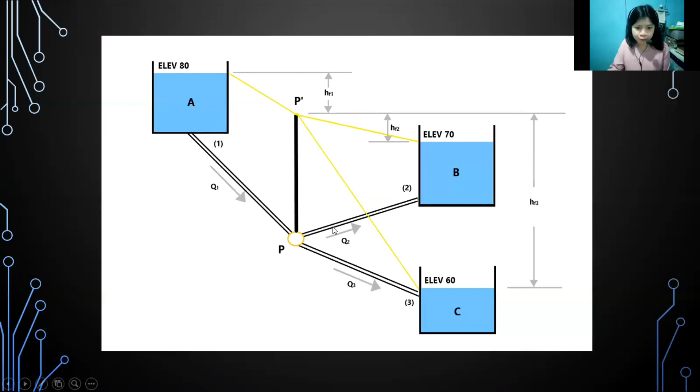So next we will solve for Q2, but first we need to solve for HF2. In order to solve for HF2, we will subtract the elevations of P prime and B, that is 73.805 minus 70. HF2 then is equal to 3.805 meters.

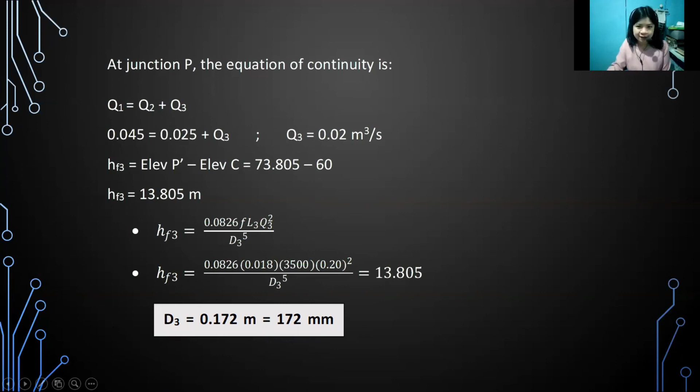Try solving this problem using the concepts we learned in this discussion. That would be all for branching pipe, 3 reservoir problems. Thank you for listening.